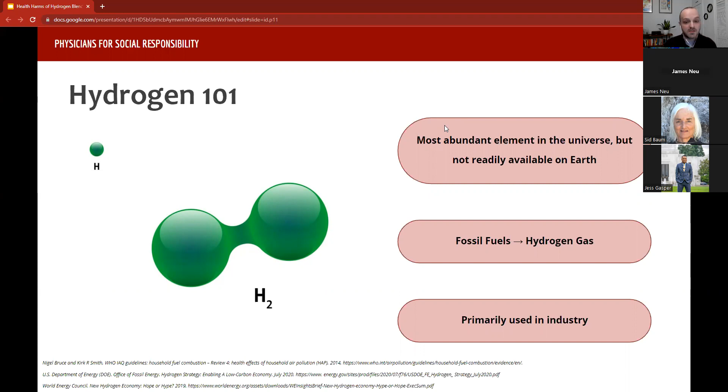Hydrogen gas is primarily currently used in industry for processes like aluminum, steel, and fertilizer production. Now, there are a couple different ways to produce hydrogen gas, and the distinctions between each are important. So let's dive a little bit deeper into the colorful world of hydrogen production.

First and foremost, let's talk about gray hydrogen. Gray hydrogen is a fossil hydrogen, which means it is derived from a fossil fuel. Gray hydrogen is made from methane gas through a process called steam methane reformation, or SMR. Gray hydrogen currently makes up about 99% of hydrogen production in the United States.

The greenhouse gas emissions associated with the production of gray hydrogen are from the methane leaks across the supply chain and the emissions emitted during the SMR process. Similar to gray hydrogen, brown hydrogen is derived from coal, so it is yet another fossil hydrogen. Both gray and brown hydrogen maintain our reliance on fossil fuels because both of them derive hydrogen from fossil fuels.

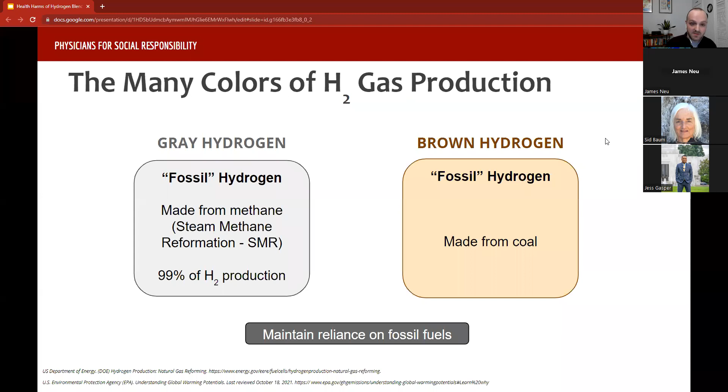Next is blue hydrogen. First and foremost, despite what you may have heard and what may be funded in the Inflation Reduction Act, this is not a source of clean energy. Blue hydrogen is gray or brown hydrogen that is coupled with carbon capture and storage, or CCS. CCS captures carbon dioxide before it makes its way into the upper atmosphere, processes it, transports it, and stores it,

typically underground. However, blue hydrogen is still considered a fossil hydrogen since it is still derived from fossil fuels, and all emissions from each part of the supply chain, extraction, transport, processing, are not captured and stored. Furthermore, CCS is far from a perfect technology. CO2 capture rates vary widely, typically around 56%, and there's uncertainty about whether or not CO2 can be stored long-term without leakage, which would defeat the whole purpose of capturing and storing it in the first place.

This is a direct quote from one of the authors of one of the studies we use as a reference here to find all these stats about blue hydrogen: "Blue hydrogen is best viewed as a distraction, something that may delay needed action to truly decarbonize the global energy economy." End quote. This is particularly important for the construction of hydrogen hubs, which may try to pass off blue hydrogen as a clean form of energy. It is certainly not. Gray, brown, and blue hydrogen all maintain our reliance on fossil fuels and are not pathways to a decarbonized future.

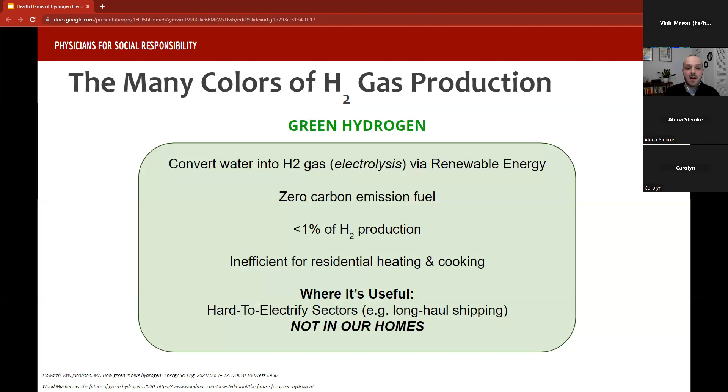Does anyone else have any other questions between gray, brown, blue, and green hydrogen? Great. Okay. Moving right along then, so that was all the context building. Now we know what hydrogen is and how it's produced. Let's now talk about the main portion of this webinar, which is hydrogen blending.

First of all, what is it? Hydrogen blending is a practice being proposed by the oil and gas industry to blend hydrogen gas into the methane gas supply for cooking, space, and water heating for residential and commercial buildings, i.e., your home.

The gas industry claims that this will reduce the overall amount of methane extracted, transported, and used overall, but this is certainly not the case. So why is this a bad practice? Hydrogen blending would negatively impact the climate, your wallet, and your health. And we're about to dive deep into each of those impacts right now.

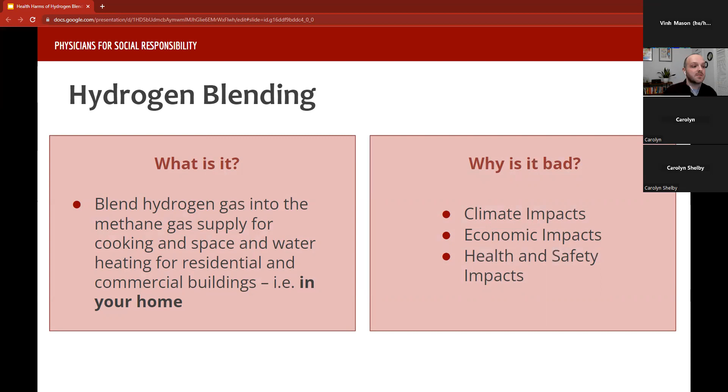So first and foremost, the climate impacts. When discussing hydrogen's greenhouse gas emissions, it's important and necessary to talk about life cycle emissions. Life cycle emissions are the greenhouse gas emissions from each part of the fuel source supply chain: extraction, transportation, refinement, distribution, and end use. They take into consideration much more than just the emissions that are caused by the combustion of the fuel for energy.

When life cycle emissions are considered, fossil hydrogen actually contributes more greenhouse gas than methane to produce the same amount of heat. With life cycle emissions accounted for, gray hydrogen produces 30% higher emissions than methane for the same amount of energy, and blue hydrogen produces 20% greater emissions than burning methane or coal for heat.

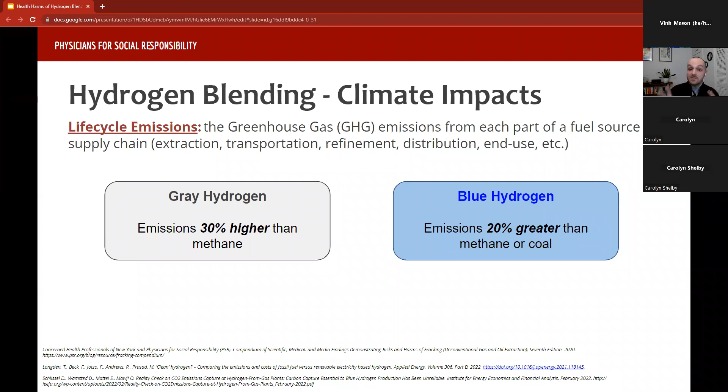For blue hydrogen to be carbon neutral, methane leak rates would have to drop dramatically to less than 0.1% across the entirety of our methane gas infrastructure, and carbon capture rates would have to reach 90%. Fugitive methane emissions from leaks currently make up about 2 to 7.5% of total methane emissions, and carbon capture rates in practice are about 56%. So it is just not feasible to expect blue hydrogen to be carbon neutral anytime soon.

Moreover, both gray and blue hydrogen production also maintain our reliance on methane extraction, fracking, transport, distribution, and use. Methane is 80 times more potent than CO2 at trapping heat in our atmosphere in the first 20 years after its release. To mitigate the worst effects of climate change and to keep warming below 2 degrees Celsius, we must end our reliance on methane gas, which means gray and blue hydrogen are out of the question.

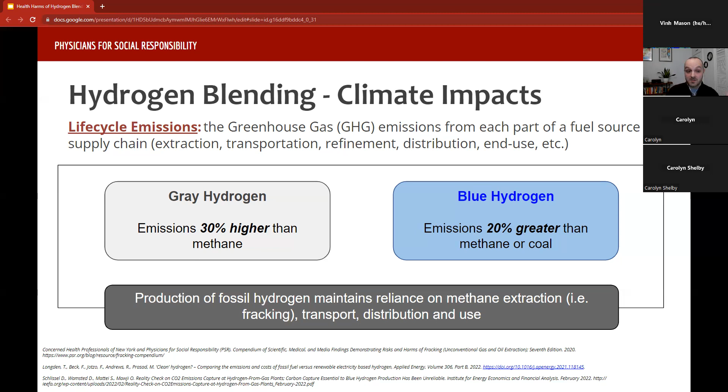But what about green hydrogen? So yes, gray and blue are bad because they maintain reliance on fossil fuels, but what about green? So yes, green hydrogen is truly a zero emission fuel source since it's produced through a completely electrical process via renewable energy. However, it is totally inefficient to use green hydrogen in our homes for cooking and heating when there are electric options available for both cooking and heating that could run on renewable energy directly.

Using renewable energy to produce green hydrogen simply to just combust it in our homes to fry an egg is not the best use of green hydrogen's time. Green hydrogen should be reserved for hard to electrify sectors like long distance transport, steel production, and electric grid balancing, which need low emission fuel sources to replace the fossil and diesel fuels they rely on to make the green transition.

On top of all of this, green hydrogen, again, only makes up less than 1% of all commercially available hydrogen worldwide. The pace of renewable energy installation will not meet the growing demands for electricity in vehicles, buildings, and other sectors, and the growing demand for green hydrogen in the industrial sector.

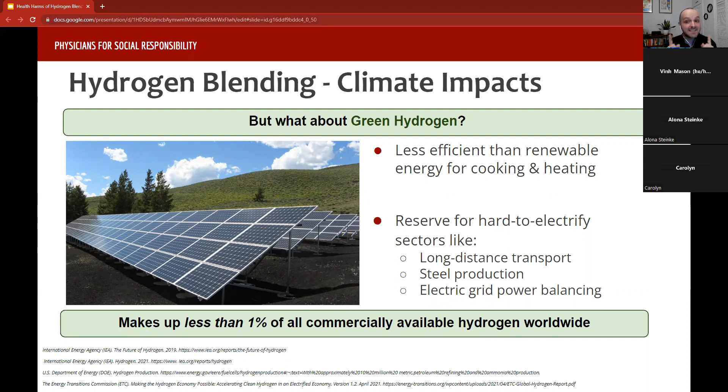Even if all green hydrogen projects currently planned were to come online by 2030, they are only estimated to reach 8 million metric tons of production. The current demand for hydrogen in industrial uses in the United States alone is estimated at 10 million metric tons. Green hydrogen certainly does have its place in the decarbonized, clean, and green future, but that place is not in our homes to fry an egg.

Next, let's talk about how much this is going to cost, because the economic impacts of hydrogen blending are pretty significant. So it is expensive to produce hydrogen. The cost of producing gray hydrogen will always be higher than the cost of methane used to produce it. For blue hydrogen, the International Energy Agency estimates that adding carbon capture and sequestration to an SMR plant will increase costs by 50% in capital costs, an additional 10% for fuel costs, and a doubling of operational cost for CO2 transport and storage.

For green hydrogen, its production cost is currently twice as high as gray hydrogen, so it is the most expensive option out of all of them to produce hydrogen. For us to reach net zero, the entirety of the gas system's infrastructure would need to be transitioned to accommodate high blends of green hydrogen or even 100% green hydrogen.

No one is suggesting we transition to 100% hydrogen in our stoves or furnaces, but even at blends of 20 to 25% hydrogen, we would then need to replace infrastructure and appliances. We would have to replace miles of transmission and distribution pipes, compressors, storage tanks, meters, and other components of the gas infrastructure system because hydrogen at high blends can damage these components originally made for just methane and increase fugitive leaks across the entirety of the methane gas system.

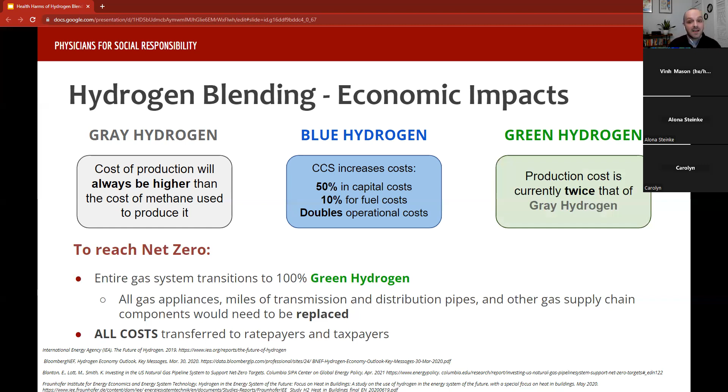Covering the economic impacts, next we go straight to hydrogen blending is bad for your health. As I've said many times during this presentation, blending fossil hydrogen into the methane gas supply locks in our reliance on methane gas use. Methane gas traps 80 times more heat in the atmosphere than CO2, and the extraction and transportation of methane leads to contaminated land, air, and water, and continued fugitive emissions through leaks in the seemingly endless miles of pipelines across the country.

Extracting and using methane gas worsens climate change, which then impacts nearly every single component of human health. I'm not going to go through every single topic on this graphic, but this graphic from the CDC perfectly sums up how rising temperatures, more extreme weather, rising sea levels, and increased greenhouse gas levels affect our ability to breathe, eat, hydrate, regulate body temperature, and fight infections.

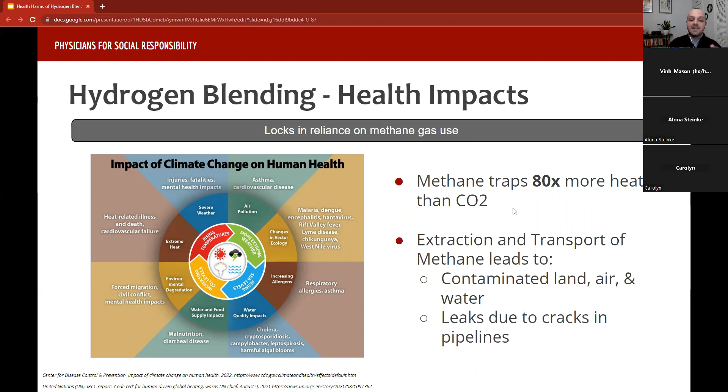Not included in this list, but absolutely just as important, is the mental health toll climate change has on folks most impacted by these effects. Climate change degrades both our physical and our mental health, and continuing to rely on methane gas will only make things worse.

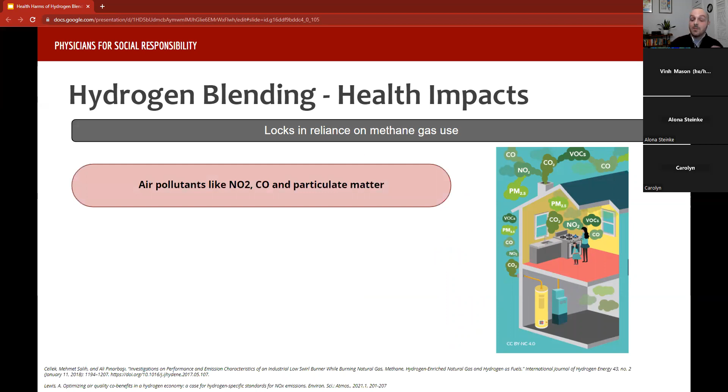On a residential scale, combusting methane gas produces dangerous air pollutants like nitrogen dioxide, carbon monoxide, and particulate matter. These air pollutants can lead to a wide variety of health impacts, particularly on children, such as leading to the development of childhood asthma, the worsening of current asthma and respiratory symptoms, and cardiovascular and neurological damage. To make matters worse, combusting methane hydrogen blends produces more nitrogen oxide pollutants than combusting methane alone.

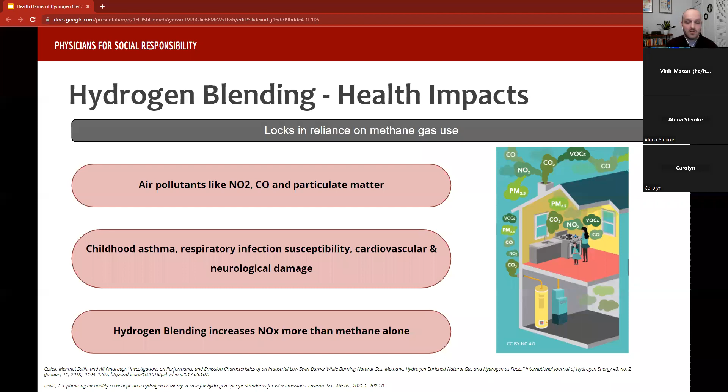Even when the gas appliance is not on, a recent study in California found that nearly every single one of the 159 gas stoves measured was leaking the cancer-causing gas benzene into residences at 7 times higher than the California Health Exposure Guide limits. So even when the methane appliance is off, it is leaking pollutants into your home, and when it is on combusting methane to fry an egg, it is also leaking pollutants into your home. The methane gas system in general is not healthy for our bodies, and hydrogen blending maintains our reliance on methane.

Next, hydrogen blending not only affects our health physiologically, but it also increases household accident and injury risk. Hydrogen ignites more easily and is more explosive than methane alone. According to a study out of the UK, the number of explosions per year and the risk of injuries from in-home explosions would be 4 times higher with a 20% blend of hydrogen compared to methane alone.

Blending gases together also increases the risk of flashback. A flashback is when the flame of a burner is extinguished due to the flame burning faster than the incoming gas, but gas continues to build up, essentially a massive gas leak. Flashbacks are dangerous because they can cause damage to the appliance and can even cause appliance shutdown.

They can lead to gas leaks in enclosed areas, and methane is already leaking inside of residential and commercial buildings when gas appliances are on and off. And hydrogen makes these leaks even more dangerous. Because hydrogen and methane burn at different temperatures and rates, hydrogen blending increases the likelihood of flashbacks.

Next, I want to talk about health in terms of environmental justice as well, because hydrogen blending is an environmental justice issue. Black, Indigenous, and people of color are exposed to more ambient air pollution than white folks and are more likely to suffer from air pollution related illnesses. Due to years of redlining and housing discrimination, people of color are more likely to rent homes with inadequate ventilation, resulting in higher levels of air pollution in the home.

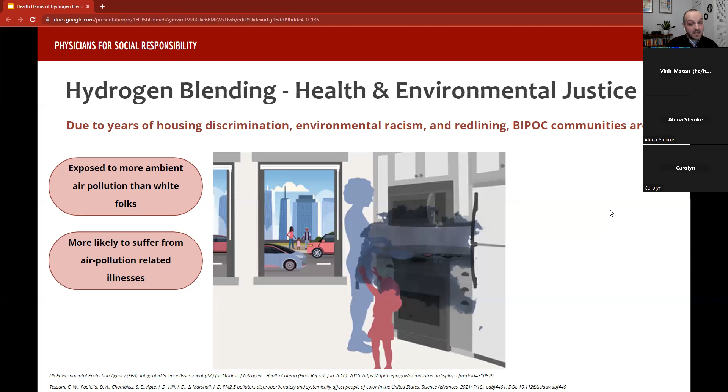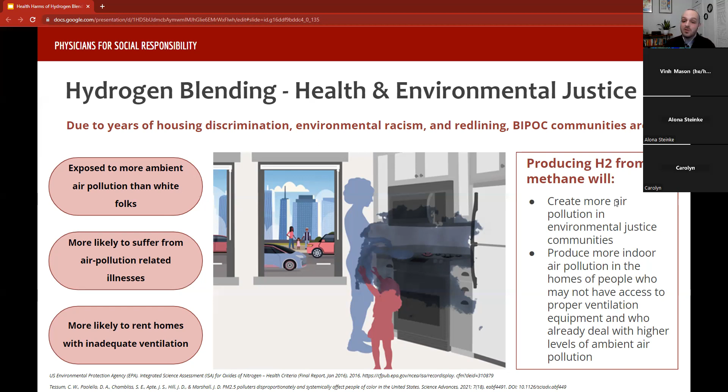Producing hydrogen from methane will cause more air pollution to be produced near environmental justice communities and cause more air pollution in the homes of folks who already deal with higher levels of ambient air pollution and may not have access to the proper equipment to ventilate the pollution out of their homes. The air pollution and risk caused by hydrogen blending will impact Black folks, Indigenous folks, and people of color more so than wealthier white folks.

Next, in closing up our discussion of health impacts, I'd like to summarize with this recent resolution that was passed by the American Medical Association in June of 2022. The AMA passed a resolution recognizing the health, safety, and climate risks of current methods of producing fossil-fueled hydrogen and the dangers of adding hydrogen to natural gas. They resolved to advocate to appropriate government agencies such as the EPA and the DOE and federal legislative bodies regarding the health, safety, and climate risks of current methods of producing fossil fuel-derived hydrogen and the dangers of adding hydrogen

to natural gas. If the American Medical Association, an organization known for being focused on the data, science, and experimental evidence of health issues, recognizes the dangers of hydrogen blending, this certainly is not a practice we should allow in our homes. So I just threw a lot of kind of depressing information at you.

So to break it up before we get to the solutions of what you can do on a macro level and on a residential level, I'd like some more audience participation. So again, throw it in the chat or unmute yourself and give us an answer. Any of these questions is fine to answer. Had anyone heard of hydrogen blending before this training? What do you think about burning hydrogen in your home? And has your local utility company proposed it as a pilot project or something that they are looking into?

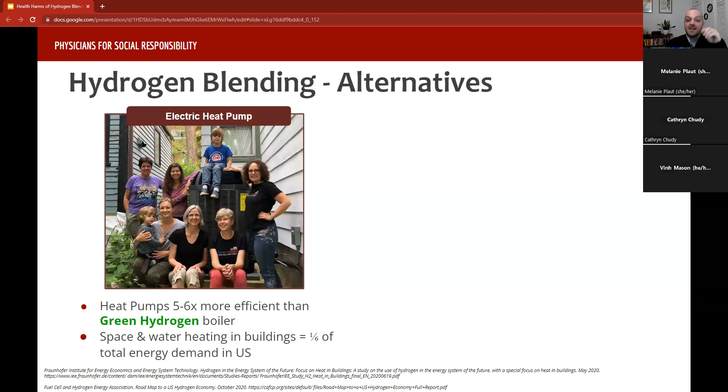As for cooking, electric induction stoves are an excellent alternative to gas ranges. Replacing a gas stove with an electric induction stove reduces indoor air pollution, decarbonizes the kitchen, and again is a more efficient use of clean renewable energy than it is to produce green hydrogen to then burn in a gas stove. Both of these appliances have tax rebates written into the Inflation Reduction Act to incentivize customers to reduce their gas use and electrify their homes. So hydrogen blending is bad for our health, our wallets, and our climate, and there are electric alternatives.

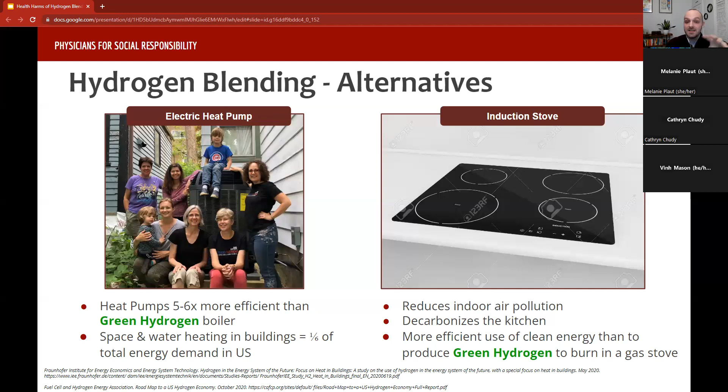So what can be done to make sure that hydrogen isn't allowed in our homes? So here are PSR's policy recommendations when it comes to hydrogen blending. First, promote and expand the use of renewably generated electricity to heat buildings. Support options such as promoting energy efficient electric appliances like heat pumps through point of purchase rebates, emissions performance standards for buildings, all electric building codes, renewable requirements for electricity production, and expanded energy storage to enhance grid resilience and performance. Next, as part of the process for considering permits for hydrogen projects, they should require comprehensive assessments and cost-effective analyses.

Next, we should require accounting for the full life cycle greenhouse gas emissions of producing hydrogen. Greenhouse gas emission inventories must take into account all the emissions that are produced throughout the supply chain. Next, we should require certification of green hydrogen to assure that it is produced using truly renewable, 100% clean renewable energy sources. And lastly, state public utility commissions and state legislators should not allow gas utilities to raise ratepayer rates to purchase hydrogen for blending, nor should they allow hydrogen to qualify for clean heat credits. These recommendations will be easier to pass through some state legislators than others, and methane gas is a cornerstone industry in some states.

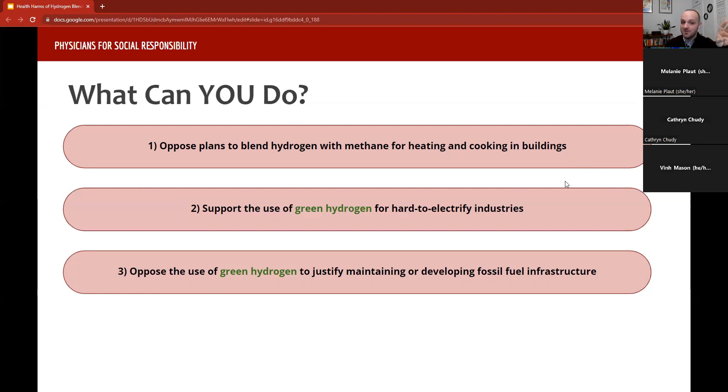Next, oppose the use of green hydrogen to justify maintaining or developing fossil fuel infrastructure. Just because we need more green hydrogen does not mean that we need more fracking wells, pipelines, or transportation infrastructure. Next, educate policymakers, colleagues, and the public about the unacceptable climate, health, and safety impacts of hydrogen combustion for heating and cooking, just like we're doing right now.

Becoming an active participant in your local government is a great leverage point to make these facts heard by the people who have the power to prevent hydrogen from entering our homes. Join a city council meeting, town hall, or call your representatives and make your voice heard.